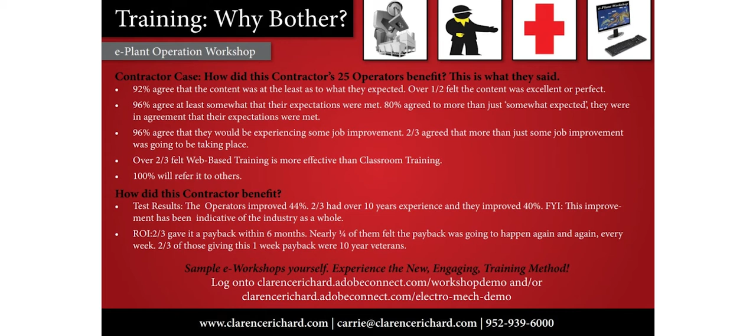And let's talk about the bottom line. This is what bean counters like to do all the time. Notice that some people give this a 1 week payback, and 2 out of 3 of those people giving a 1 week payback were 10-year veterans. Here we had 3 people out of 25 participants giving this a 1 week payback. I think those are pretty high marks. You can take that to the bank anytime.

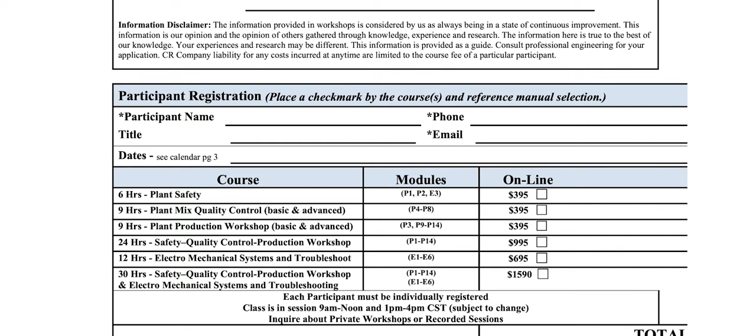And here we are, this is what you see. It's just a few pages. We start out with your company information and your payment and billing address, all that kind of stuff. Then we've got some areas in here for adding your people that want to participate. Notice all we're looking for is the participant name, the phone number, the email, and their title.

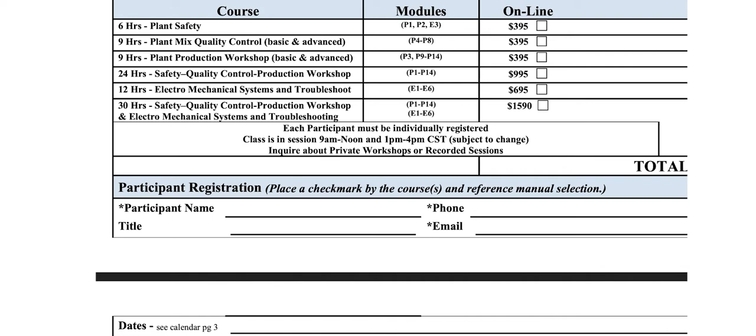And then you go down there to the course description and pick out what you want to do. So you can have any particular day, or you can do a 4 day, a 5 day, or a 2 day, just depending on how you want to mix and match. Notice the modules there are coded with different P numbers - those are their module numbers. And these are the prices for those particular modules you want to take.

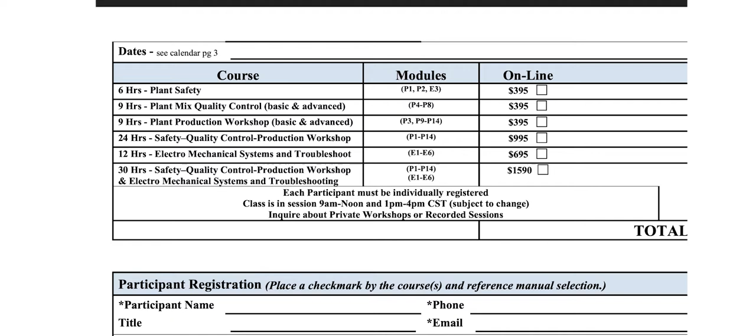You can add more people to this, as you can see right here. Again, here is our calendar that you can take a look at as well. Notice the days are color coded: red, green, black, and also purple for the electrical. That is part of the key here on what you're going to be seeing to easily figure out what you're getting.

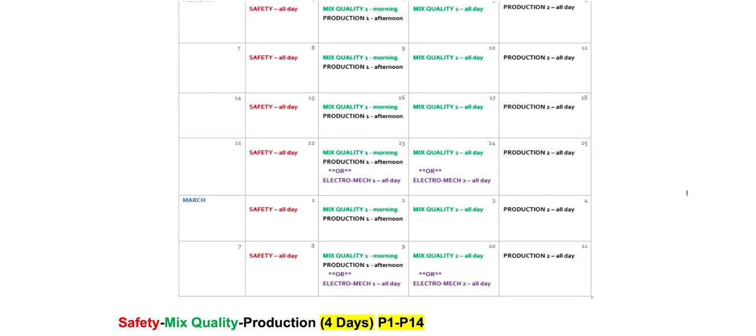Notice the first one we got all 3 colors: safety, mix quality, and production. That makes a plant operation workshop. Safety around the asphalt plant, what affects mix quality at the asphalt plant, and what affects production at the asphalt plant, as well as the operating costs.

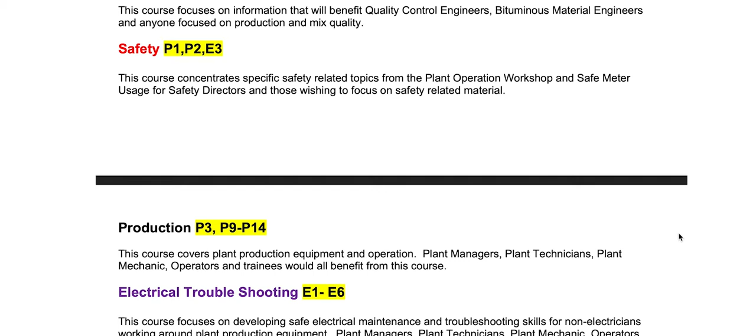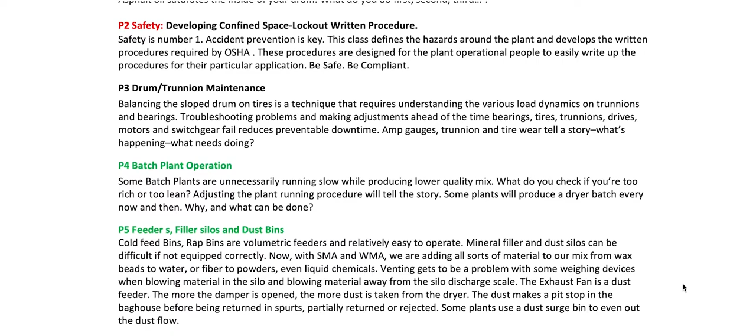So you get that all there with the plant operation workshop. Then you can start to work there with the electrical troubleshooting, and that's a 2 day workshop. You can see that that's in purple. Notice the color coding on our different modules as we're explaining them, we go down, so this is what is going to fall in place with the different days you'll be getting.

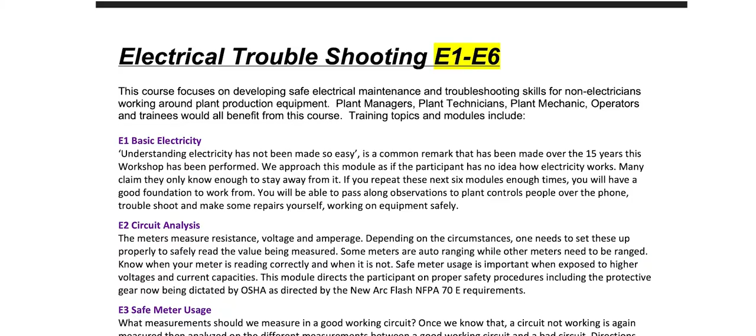Information: we're going to do this as an instructor led class, so it's not self-paced. We get to go through this together and see how you guys are working on that. And as I tell everybody, this is your class. If you say stop, I want to know more about this thing right here, then we're going to stop and dwell on that. We can easily do that. We've got plenty of time for it.

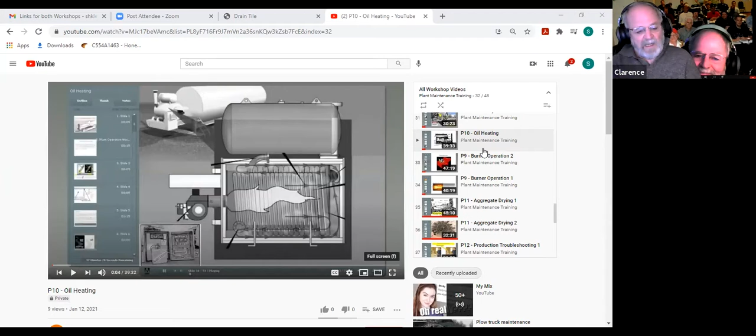This is production day, and we're going to do everything we can to get our production up at the plant as high as we can. So if demand is there, we can still continue to run very efficiently with the highest production possible. Consequently, we're going to be talking about things that consume energy, like driving off moisture from your aggregate and heating up that rock and the asphalt oil. Those things all have a lot to do with how fast your plant can produce. So we'll keep up with that.

We're going to go through that. We're going to talk about your burner, the fuels that you use, and how much energy they consume. We'll even talk about tuning up your burner, or watching someone tune up your burner, looking over the shoulder as they do it.

Then you too can have input on getting the best production possible, and we teach you how to do that. The bag houses and just how you operate those can affect your production. This is about the aggregate drying, how it actually happens, and what's the best way to operate your plant. Operating your plant has a lot to do with saving energy.

That's about it from my perspective as far as I work with David. We also build custom control systems, and we've invented these things called flow scales. You pour material through them and we weigh it on the fly. It's like a belt scale, but when you can't use a belt scale, we can do this continuous weighing instead.

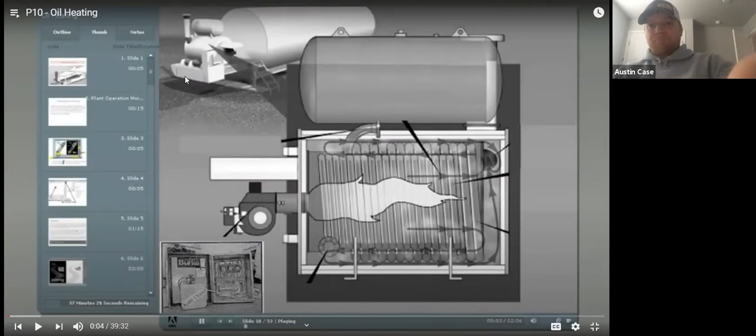All right Kobe, what type of fuels do you burn on your plant? It's propane, that's what we burn, as a liquid, correct? Yes. Austin, what do you burn? I burn natural gas. Ken, what do you handle in your plant? We burn waste oil. And Rob, what have you got? Natural gas. Okay, so we've got all three: gas, LP, and heavy fuels. Each of those has got a whole different way of handling them, and Steve is an expert at that. So anyhow, as we go through this, you'll get to understand that.

Please continue. Things I'd like to ask them, Steve, is I would like them to think ahead of time about what temperatures they are running through their plant. This gives us an idea how efficiently you are working. Just think of that oil heater you're seeing right there, that's a stack. If you had a really high temperature stack versus a low temperature stack, which stack do you think is running more efficiently?

Well, you don't want those high temperatures. You're just puking a whole bunch of heat out into the air and atmosphere, heating that up. So the cooler that is, the better you are as far as efficiency at your plant.

Keep an eye on the temperature around your plant, it tells you some stories, and we're going to go through those stories on how that works. But a couple things you should keep in mind right up front: what is my stack temperature at the exit? What is my dryer exit temperature, or my baghouse input temperature, that crossover point? What's that temperature? And then you'll be comparing that to your mix temperature.

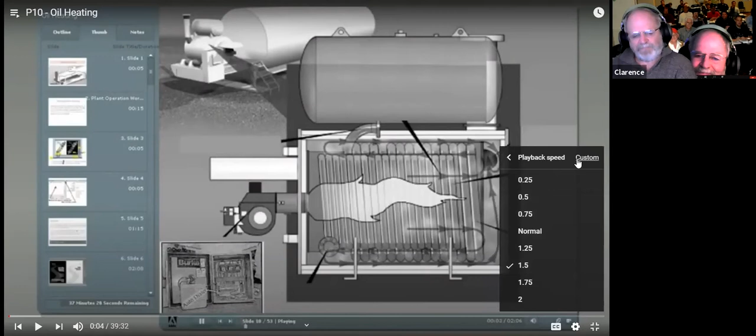Keep in mind, we're going to be playing with those numbers as we're going through here, and that was to give you an idea how efficiently you're running. And if it starts to get inefficient, then you should start doing something about it. It's a continuous thing, continuously updating and maintaining, and if you do that you're going to be keeping your equipment in good shape while getting the best production possible. That's all I got, that's my story, I'm sticking to it. All right guys, and away we go.

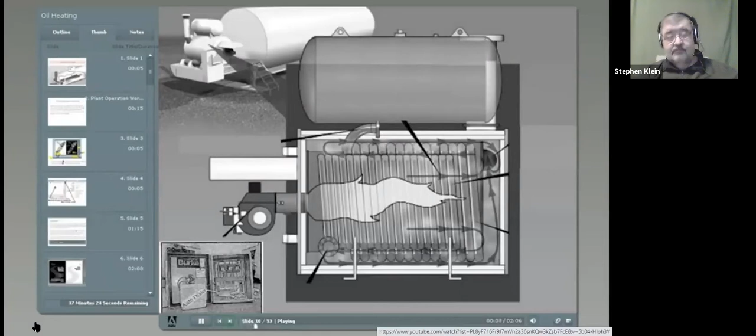Hot oil heating and asphalt storage. Asphalt oil and components in the plant are heated by several different methods. Choose all that apply.

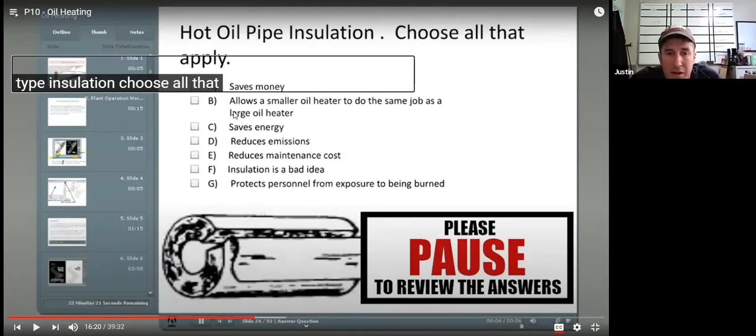Hot oil pipe insulation, let's go with Justin. Does it save you money if you insulate the pipes? Yes. Does a smaller heater possibly do the job of a larger one then? Yes. Do you save energy? Yes. Reduce emissions? Yes.

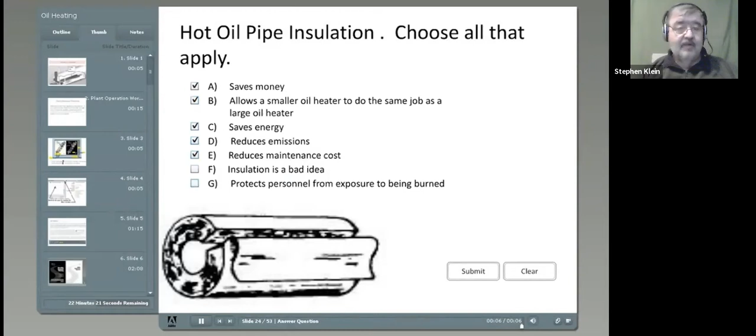The correct answer, we gave that one to you. It does reduce maintenance costs, you gotta say yes anyway. Yes, and it protects personnel from being burned. Insulation's a bad idea? I can get somebody to say yes to that. That's the guy that's selling you diesel fuel for your hot oil heater. He thinks insulation's a bad idea because he can't sell you as much oil.

Yeah, those all kind of make sense. A, B, C, D, E, and especially G. Anybody that's ever bumped up against the hot oil pipe at the plant will know that G is true. Yep.

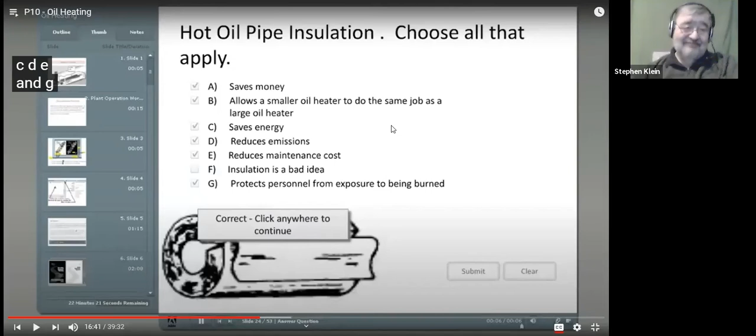Agitation of stored liquid in tanks. Heated tanks have a natural convection current as the asphalt cement heats and cools.

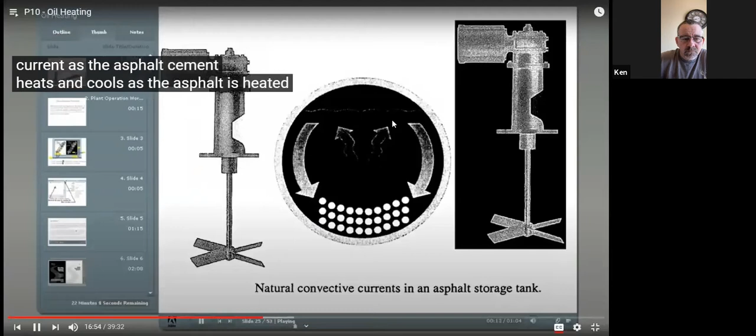Yep, I see. Oh, you want me to look in my book? Yep, please do.

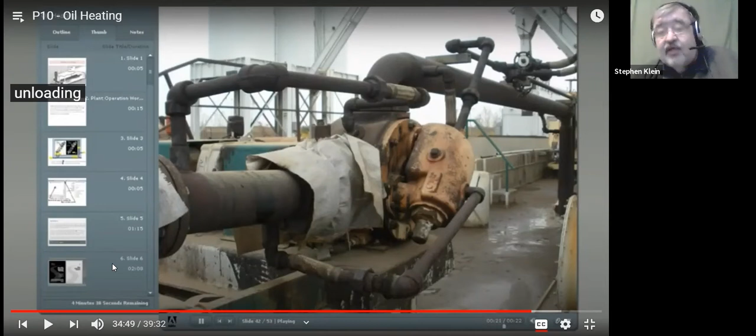Unloading and plant pumps must be fitted with this option. This option is sold as a kit by most all pump manufacturers and can be easily field retrofitted. Please notice that on that cover, that is a jacketed relief valve, it is heated, so it will continue to work even when oil goes through it.

And that's the end of that paragraph of slide 42.

Now here we've got the hoses hanging. You can see the one in the upper part of the picture, how well that would drain back. The one down here in the lower part looks like it might have a kink in it where they should have hauled up the pipe just a little bit further.

Another thing to remember here is to make sure you've got a cap on the end of the hose, be it a tin can or an actual cam lock plug, to keep moisture out.

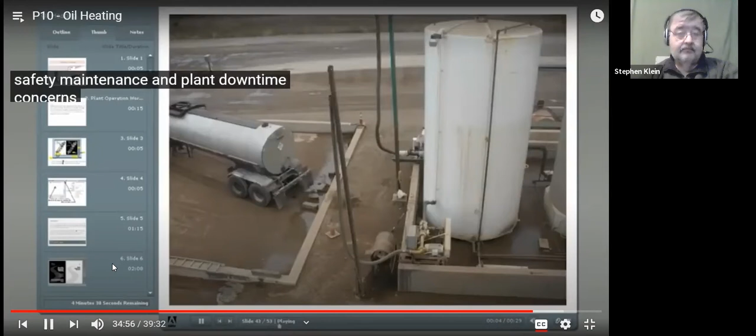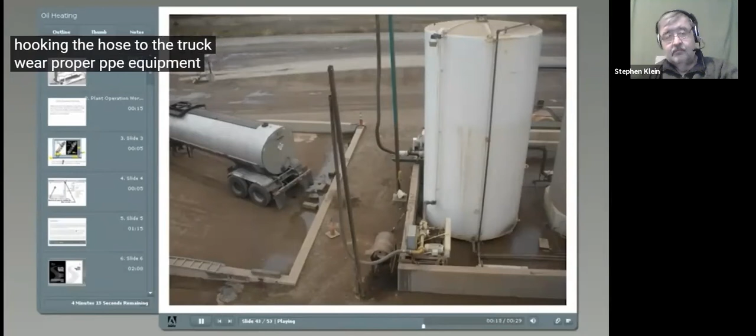Time concerns dictate tools and procedures to aid in good housekeeping. Hang the hose, wipe down the connections. Make sure the line is clear before hooking the hose to the truck. Wear proper PPE equipment.

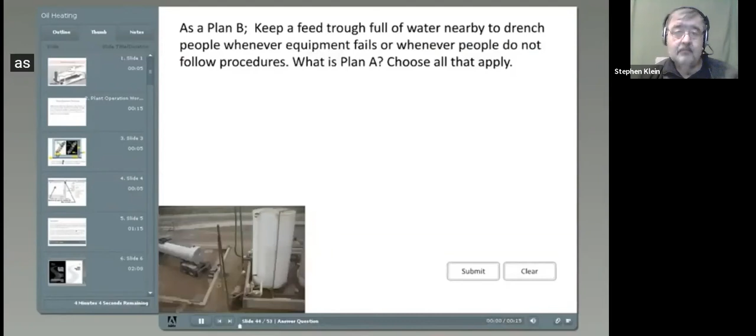As a plan B, keep a feed trough full of water nearby to drench people whenever equipment fails or whenever people do not follow procedures.

What is plan A? Choose all that apply.

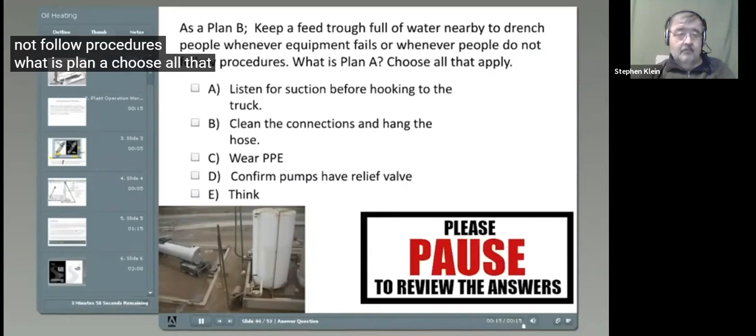All right, Justin, which ones do you want to pick?

This module explains the combustion process, some of the different burners on the market and the fuels they use, and the many concerns about controlling and caring for such a dangerous and important process.

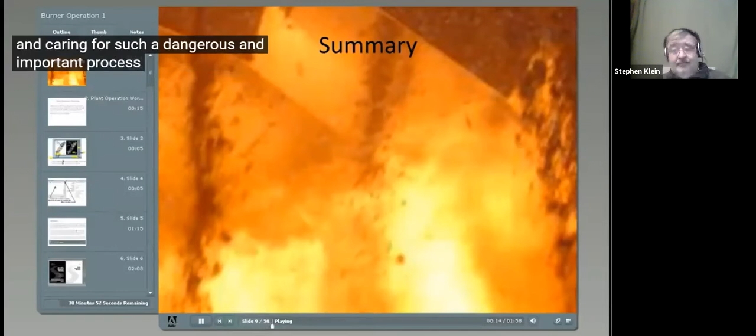Plant management should understand that average conditions mean 5% aggregate moisture at a 300-degree mix, using 275,000 BTUs of fuel per ton.

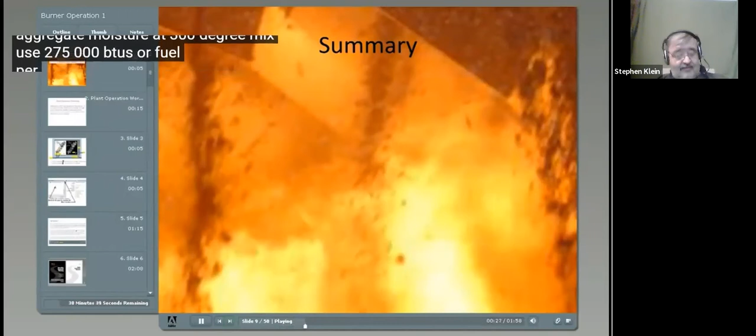Fuel consumption should be checked regularly. Oil is about 140,000 BTUs a gallon, propane about 90,000 BTUs a gallon, and natural gas is 1,000 BTUs a cubic foot.

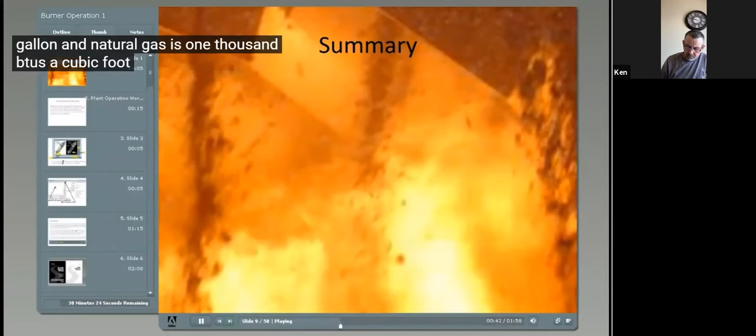Fuel consumption is about 2 gallons per ton for oil, 3 gallons per ton for propane, and 275 cubic feet for natural gas.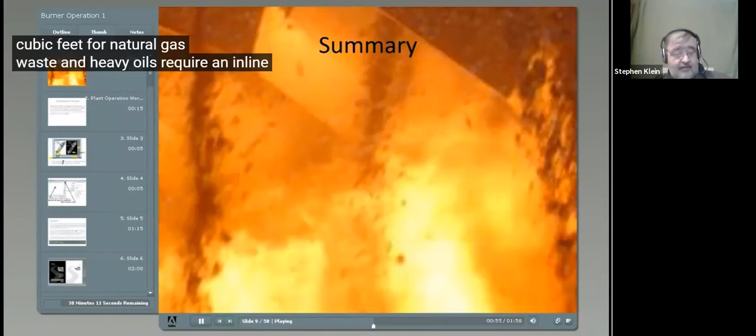Waste and heavy oils require an inline heater. Consuming too much fuel wastes money and causes low production. Material falling through the flame causes incomplete combustion.

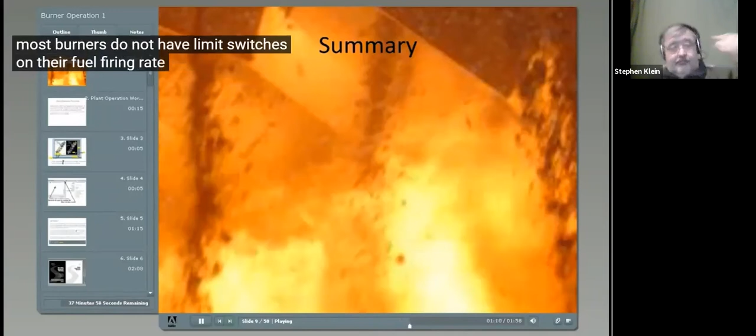Most burners do not have limit switches on their fuel firing rate valves and air dampers. See Module 2, Safety Interlocks.

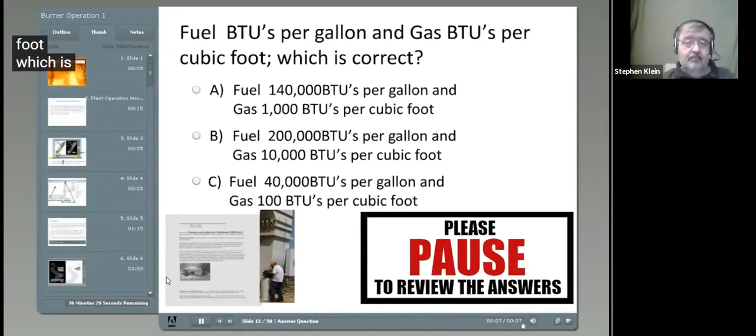Fuel BTUs per gallon and gas BTUs per cubic foot, which is correct? Okay, Austin, did you happen to remember that? Gas was about 1,000 BTU, so A, that would be right. That sounds good to me.

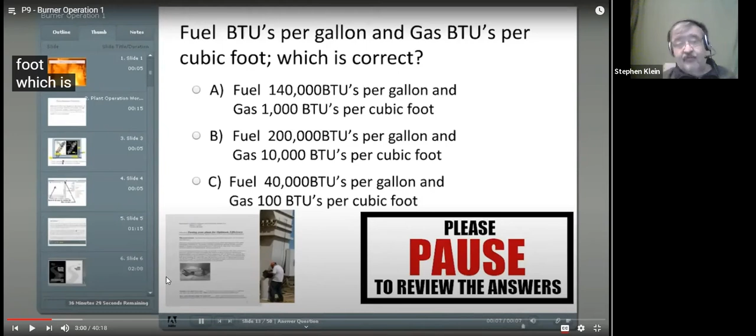For propane it's right around 90,000 as a rule of thumb. Fuel oil is actually 138 if it's diesel, but that will vary depending on what exact fuel you have.

The correct answer is A: fuel at 140,000 BTUs per gallon and gas at 1,000 BTUs per cubic foot.

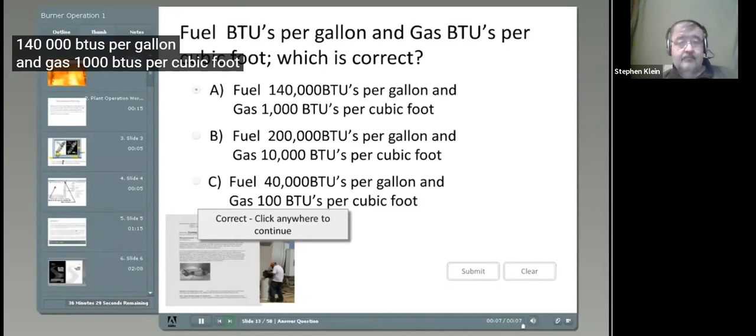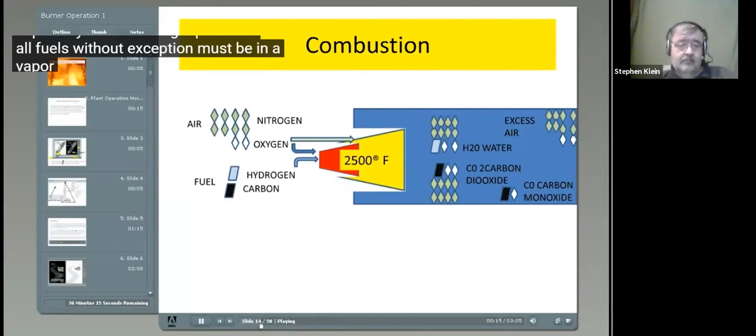Fuel and fuel atomization: good atomization is probably the most important factor involved in achieving good combustion, especially when burning liquid fuels. All fuels, without exception, must be in a vapor or gaseous state before they can burn.

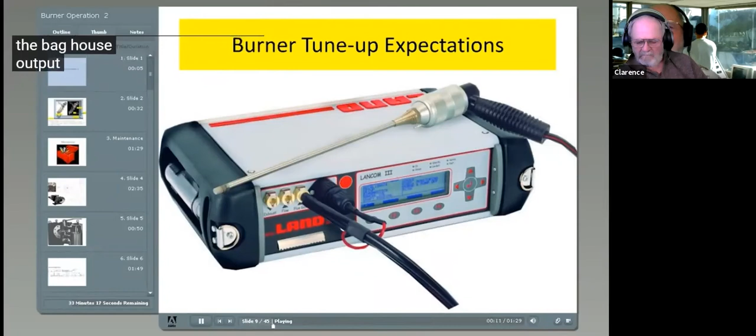Burner tune-up expectations include improved performance, low fire stability without overheating the baghouse, output at 100% burner close to nameplate rating, and a controller maintaining stable temperatures in automatic mode.

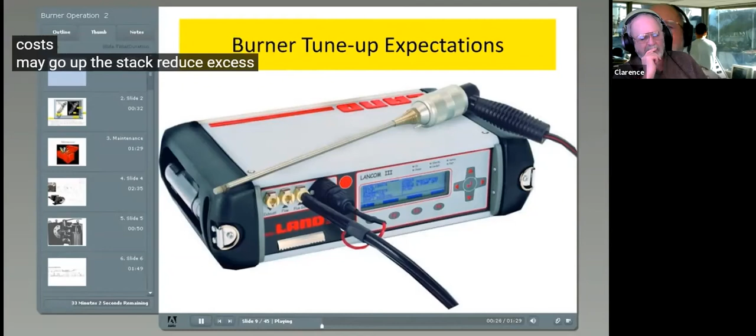Up to 25% of your drying costs may go up the stack. Reduce excess air at burners, evaluate stack temperature and dryer flighting, and assure complete combustion.

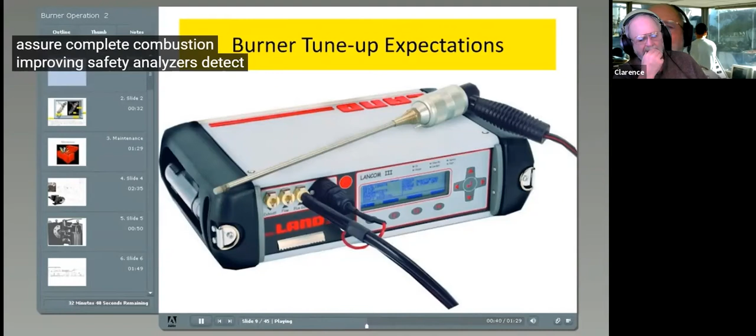Improving safety: analyzers detect unburned fuel, solve flame stability problems, and verify motor and proper burner operations.

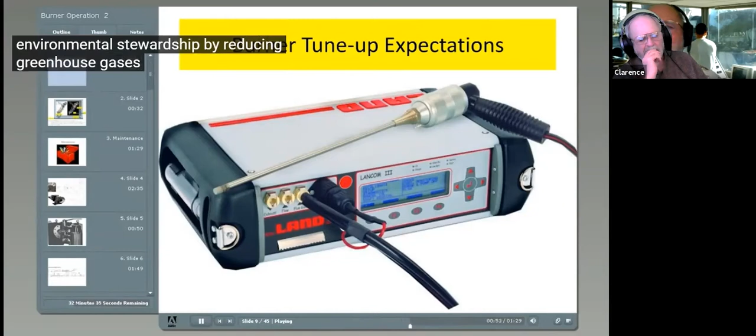Environmental stewardship comes from reducing greenhouse gases. Burners are sources of many problems that could irritate neighbors.

If your company does not want to own an analyzer, you may be able to talk them into renting one, such as from Raco Rents, R-A-C-O rents.com.

That way you would have an analyzer that's been calibrated. You can use it for a week or so and send it back to them.

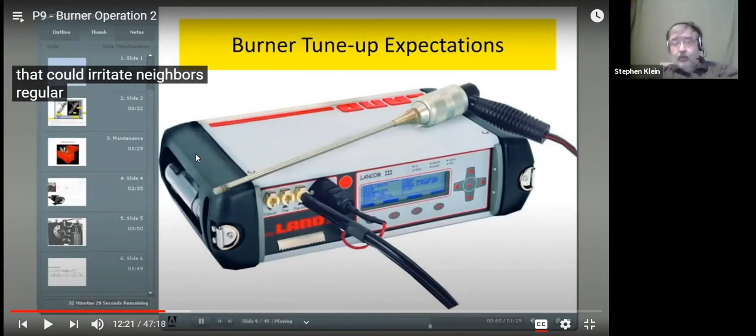Mix producers should own and operate their own combustion analyzer. Mix producers spend hundreds of thousands of dollars at each plant, so they have the most to gain by controlling for the highest production and least operating costs.

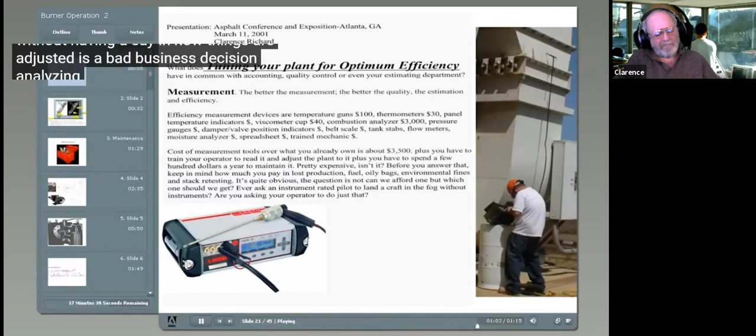Subcontracting that task out without having a say in how things are adjusted is a bad business decision. Analyzing and adjusting in-house gives you control. Download the Tuning Your Plant for Optimum Efficiency PDF, which justifies this small expense to the financial controller.

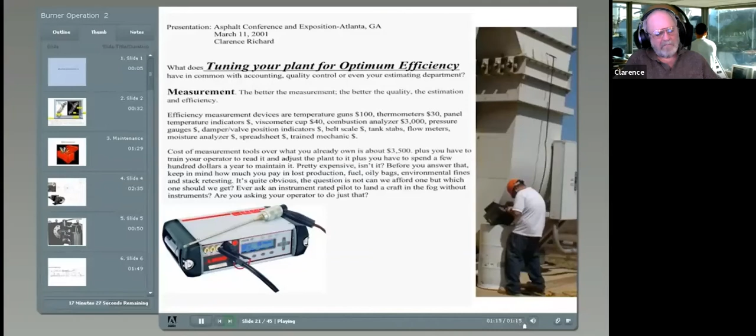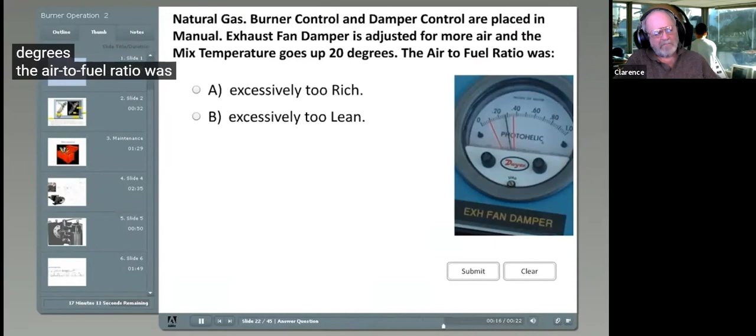For natural gas, burner control and damper control are placed in manual. The exhaust fan damper is adjusted for more air and the mix temperature goes up 20 degrees. Was the air to fuel ratio excessively too rich or excessively too lean?

All right guys, which way do we think that was? Set up the scenario, Steve, set it up.

Ken, you've been running the plant and we've got everything running good. We're locking it down, and now we're increasing the air flow through the plant, and the temperature goes up. Before, when we started, were we running too rich or too lean?

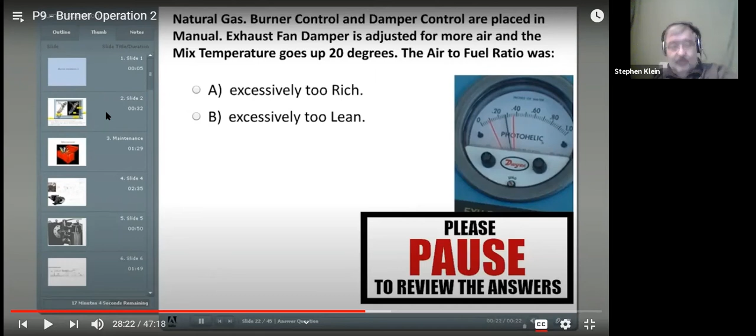We'd have been running too rich on the fuel. Since adding more air created more heat, that means we're burning up fuel that wasn't getting burnt before. That is so correct - A. Good. The correct answer is A. The air to fuel ratio was excessively too rich.

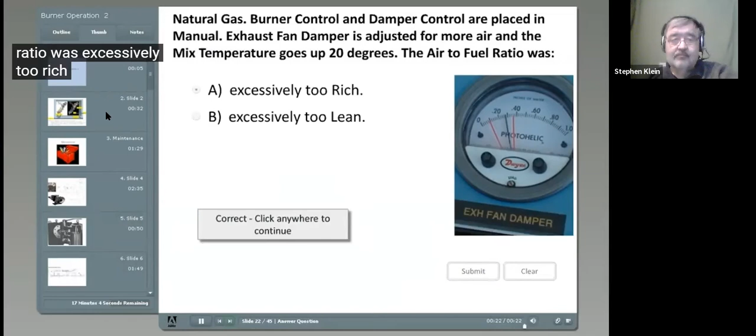Since it was too rich and you turned it up, your mix temperature goes up as well too, doesn't it? Yes, it should follow. So now your mix temperature is too hot. Then what are you going to do? We're gonna back down on the fuel. So now your burner position might be going from 50% to 45%. Now you're at a lower burner position than before, and you're heating up the same amount of material with the same temperature. So you can see that you are now too hot. Now you're too hot, you're going to bring down your firing rate, and that means you're going to be using less fuel, and that was a good move.

So that's the connection I want you guys to make - look at what you did. You open up your damper, it went too hot. Now you turn down your burner. This is instrument rated, and you guys are taking corrective action for it.

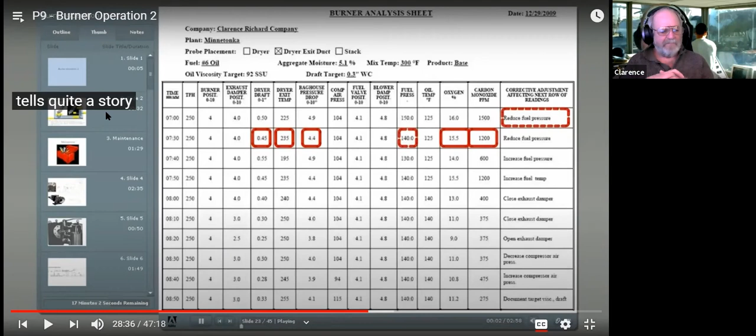This tune-up took about 2 hours. It helps to keep variables affecting combustion consistent so as to determine if the adjustments made were correct or incorrect.

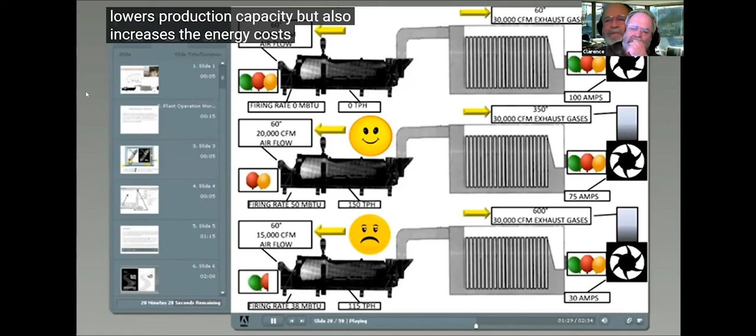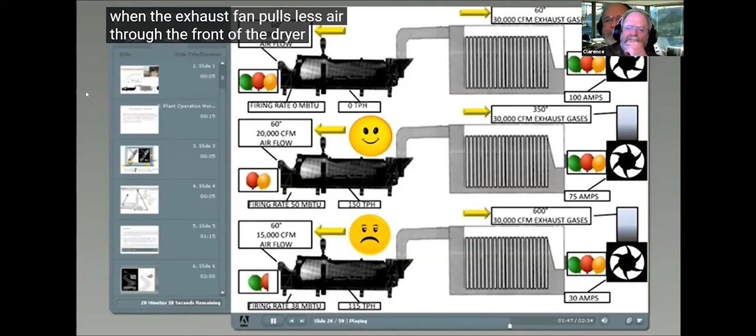When the temperature changes through the fan, so does the amount of air being pulled through the front of the dryer. Air is necessary for combustion. When the exhaust fan pulls less air through the front of the dryer, the maximum burner output decreases as well.

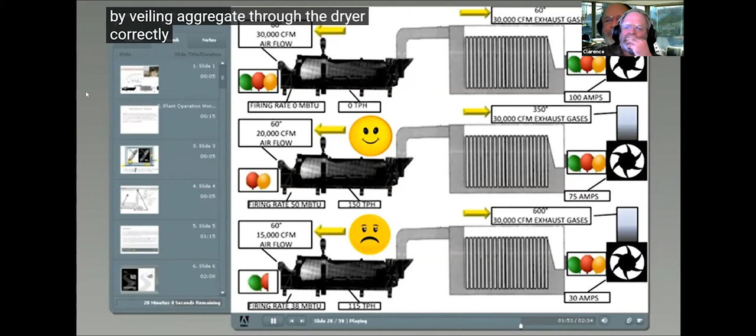When this happens, the management should be disappointed. The temperature needs to be turned down by veiling aggregate through the dryer correctly. The payback is not only in production, but in saving energy. That extra heat being put in the atmosphere is now being put in the aggregate, allowing us to turn down the burner.

So here we're going through our summary. Let's go through the summary on this, and then let's talk. Primary collectors are used to reduce the particle loading to the secondary collectors. Primary collectors capture the larger particles. Counterflow dryers need higher efficiency primary collectors than parallel dryers or drum mixers.

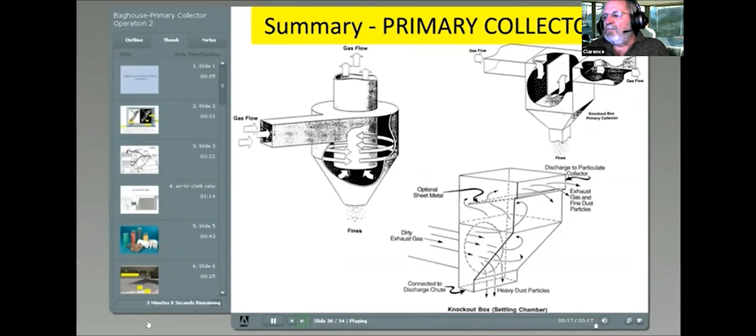Temperature indications are important. When comparing the baghouse inlet with outlet, the temperature drop may be determined. Low temperature drops are good. Baghouse exit temperatures should be no lower than 220 degrees. Cooler temperatures cause moisture and steam to condense.

Dryer exit temperatures: for parallel flow, 10 to 20 degrees above mix temperature. For counterflow, 240 to 260 degrees. Bags deteriorate rapidly at 425 degrees.

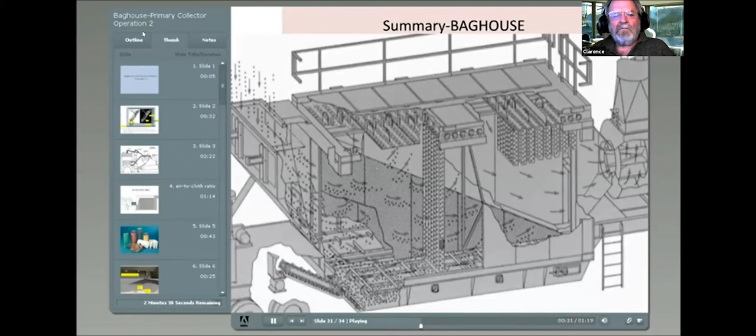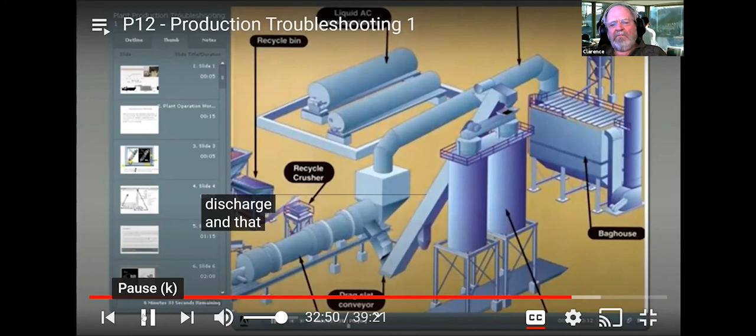There are two methods of judging the efficiency of operation of a parallel flow drum mix plant: 1. Determining the differential between the temperature of the mix upon discharge and that of the exhaust gases at the same point. And 2. Observing the asphalt mixture as it is discharged.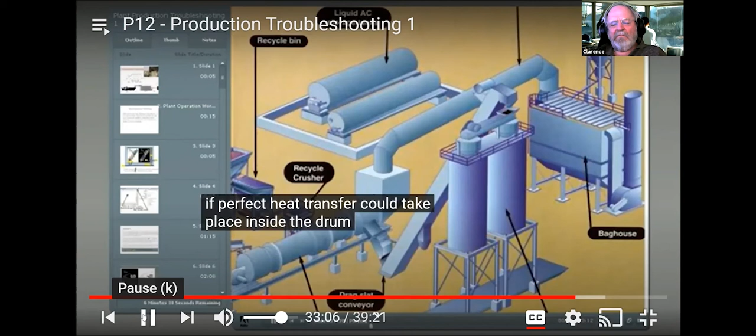Mix and stack temperatures: if perfect heat transfer could take place inside the drum, the temperature of the mix upon discharge from the parallel flow drum mix plant would be equal to the temperature of the exhaust gases at the same point. So I'm going to stop screen sharing here.

And so I guess we get to see everybody's smiling faces. Rob looks like he may have had to duck out. Oh, there he is - good morning. He's coming up for air. So tell me, gentlemen - wow, I can move these guys around? Guess not.

I'm seeing a grid of people there. If you unpin them, you can move them. You gotta hold it there for a second and it'll move wherever you want. Really? Yeah.

Oh wow, now I just made Rob the top of the class. Way to go, Rob. Check your chat line, I sent you a chat.

Okay gentlemen, this kind of tells us about what we did for the production thing. We learned about the kind of things that are going to be affecting production. One is our bag house, the resistance that that does. One was the fact that we got moisture, and what we could possibly do there is just keep dry stuff coming in, how you load it up, maybe if there's a way to drain that off. Maybe some people even put their stockpiles under a roof, I've seen that before. Then we also talked about air leaks being a really big problem.